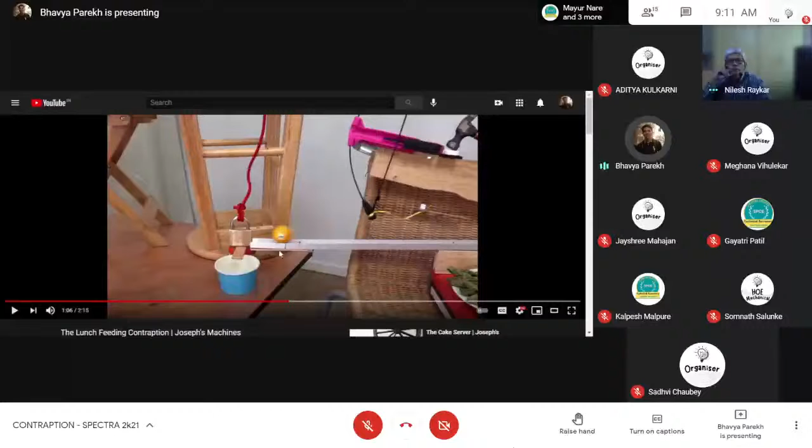Below was connected a ball. So just a very minute displacement of the string connected to the ball will allow the ball to roll. Part of the reason is that it is very important to keep such balls at their unstable equilibrium, so that even a small disturbance would allow them to roll and complete the mechanism.

Here the bowl filled with soup transfers some of its energy to the vertical section, and thus it falls down, and the bowl continues to travel further. And here are connected two cells. These cells are connected through wires to the terminals of a clock. So just when the bowl reaches the end, the clock receives power and starts to tick.

Here the bowl continues; it is hinged at the bottom. So as the ticking arrow pushes the other side of the bowl, it is raised more and more, and the soup is served.

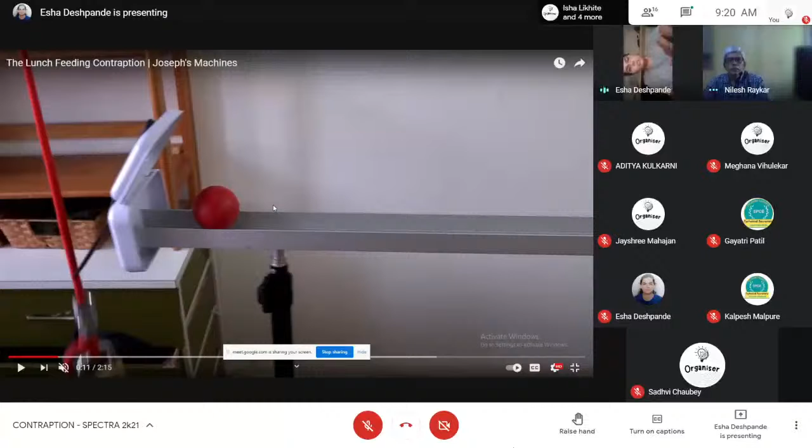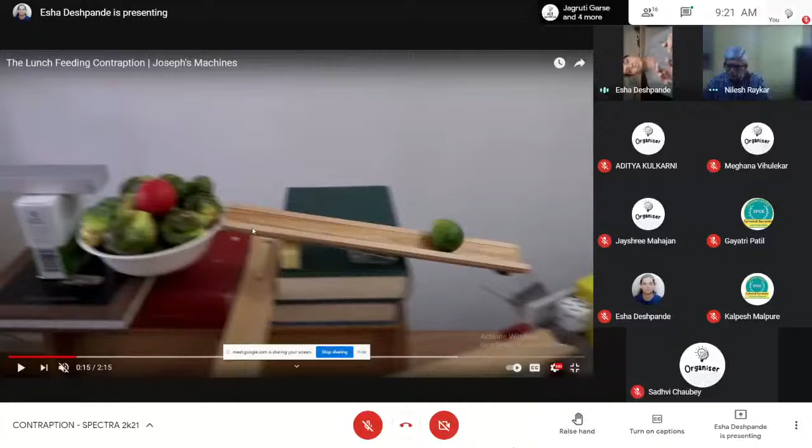As it rolls down, the ball falls in a Brussels sprouts bowl, pushes the Brussels sprouts, and the Brussels sprouts start rolling down. When the Brussels sprout is at the end of the ramp, more weight is acting at one end of the ramp and there is no weight on the other end. The wooden slide is fixed in the middle by a hinge, which is free to rotate. So the higher moment acts on one side of the ramp and there is no moment on the other side, so it moves upward.

When it moves upward, the slide is supporting the board, and the board is unevenly placed on the book. More weight of the bowl is suspended in the air, because of which it topples down. When the bowl is inclined, the ball again falls down and starts rolling on an inclined plate, and here the ball pushes the obstacle created to stop the rolling of the Brussels sprout. When the ball pushes the stopper, it falls down, and the bowl rolls down.

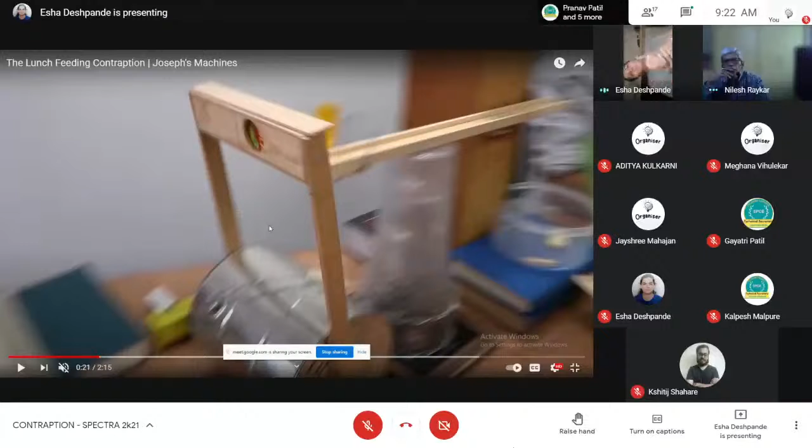While rolling down, the bottle is kept on the wooden structure to stop it from rolling. When the ball and the Brussels sprouts fall in that structure, they push back the bottle. Then the tin container is free to roll, and to acquire its equilibrium position, the tin container rolls until the wooden structure is horizontal. At that point, the Brussels sprouts fall in the container, and the ball again starts to roll.

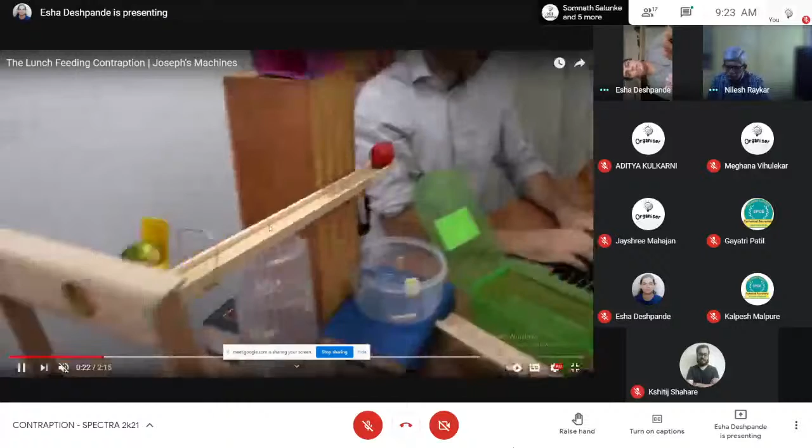When the ball starts to roll, it rolls through an inclined wooden surface at the end. Again, because of the higher weight of the ball acting on the other end of the rod, which is pivoted maybe a little lower than the center, the higher moment acts on the upper side, and the Brussels sprouts container moves horizontal and again rolls down to Joseph's mouth.

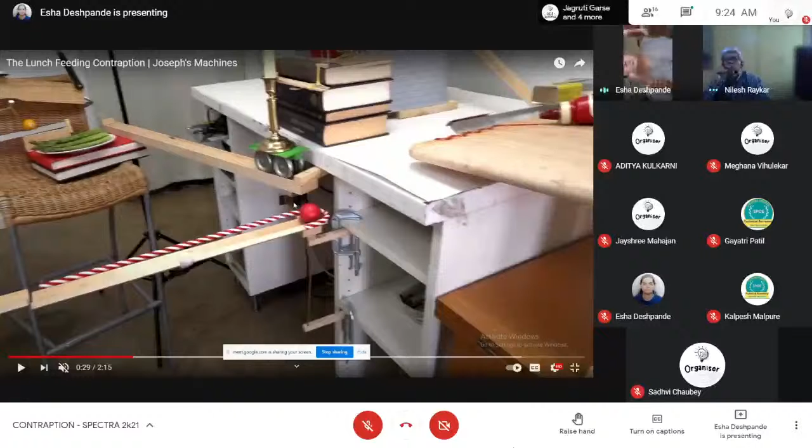After this, when the red ball rolls down, it falls in a container, and there is a hole in the container through which it rolls down further. While moving further, a Christmas red-white stick is attached, and when it collides with that stick, I guess because of a torsional spring, it tries to rotate as the weight is acting on it. After rotation, again because of the inclined plane, it starts moving.

Here it hits the weight, which is maybe lower than the weight of the ball, and the weight is attached by means of a rope to the clip. As the weight acts on it, the rope stretches the clip, and the orange placed on it is free to move.

And because again there is more weight at one side and no weight at the other side, because of that weight on the one side the moment acts, and that H type of wooden structure is open from the one end. Now because of again the inclined plane, the sausage rolls and is covered where the sauce is spilled; it's covered in sauce.

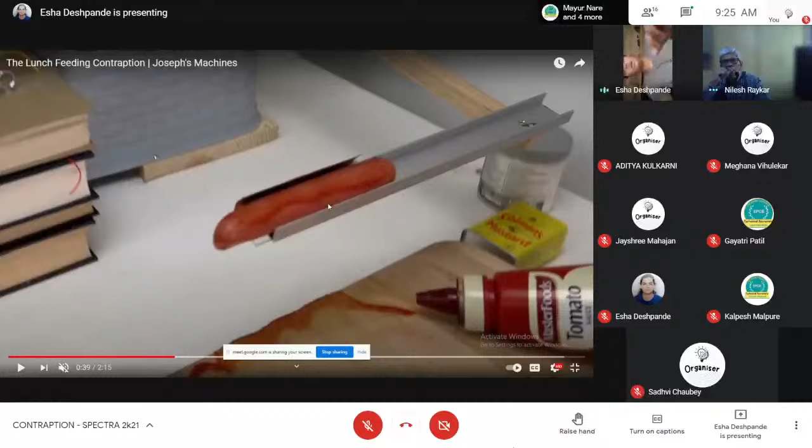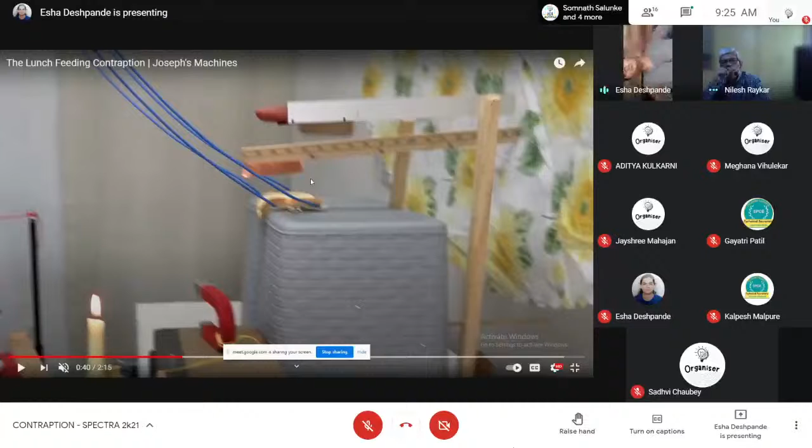And when the sausage enters that C type metal plate, when it's rolling down in the plate, because some weight is acting downwards and the obstacle given to it keeps the plate from moving, it falls down. And after that, while moving it, there is more weight attached on the other side of the board. And because of that more weight on the other side, it tries to rotate, and after rotating it falls

in a bread slice, where the bread slice is covered with a cotton or cloth which is attached with strings, and the magnets are attached to both ends of the sausages. When it falls in, it bends in the middle, and the ends of the bread and the cloth come closer, and because of magnetic pull it sticks. And after that it is just free to move.

Because of oscillations, two times it goes straight, but the third time when it's going in Joseph's mouth, Joseph moves his head a little bit, so that the path of motion of that string changes, and the bigger magnet which is kept there attracts the smaller magnet, and it gets stuck to it. And when the bigger magnet is attached to the small magnet, it falls down, and the rope tries to

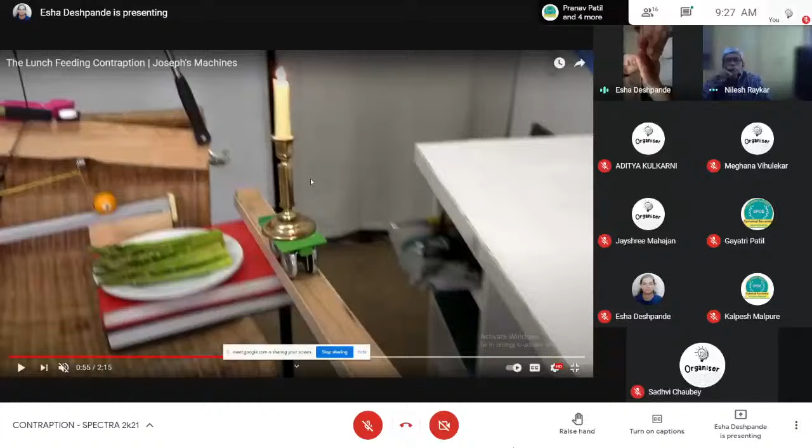pull the obstacle created for the candle; the obstacle rotates around the fixed support, and then the candle is placed on a rolling car-like toy, which is again on an inclined surface. So it again rolls down, and because of the flame of the candle, the hammer which is

attached with a plastic rope, the rope melts, and then the hammer, which is fixed at the lower end and free to rotate about that fixed point, falls down and triggers the bow, which throws the asparagus from the bow to his mouth. And in the last, there is a string attached to the rope of the bow, and

an obstacle created for the lower ball. As the rope of the bow is moved forward, the obstacle rope gets stretched, and the obstacle is rotated about its axis. The ball falls down, which then pushes the lock, and both fall down.

Sorry to interrupt you, but I guess your time is up now. Okay, sorry. Okay, yeah, that's right.

Okay, so Esha, now let's come to the very first thing, that ball, and that ball hits the fruit bowl in the beginning. Yes, sir. So, at what velocity should that ball hit the fruit bowl? Is there any calculation for that, so that the fruit is pushed out? Can you go to that part of the video? At the very beginning? Yeah, this one.

So how will you ensure that this ball pushes out that fruit and doesn't just drop there? Sir, actually, maybe the weight of the ball is comparable with the weight of that Brussels sprout. Okay. Maybe a little higher; if the weight of the ball is higher than the Brussels sprout, it can easily manage to push the Brussels sprout through the next ramp.

Yeah, but if it is too much, then it may push it out too much. Yes, sir. So not very much, but sometimes 2-3 grams more or 4-5 grams more. That is okay. That is by trial and error. But if you have to do a calculation, what calculation can be done?

So maybe the calculations of collision, the momentum. So the energy of that rolling ball and the Brussels sprout before and after collision must be the same. It is conserved, so after which we can get the mass and velocity of it. Okay. And if you have to replace this mechanism designed here by something of your own, what will you do here? You have to push one of the fruits out of this thing without using this ball.

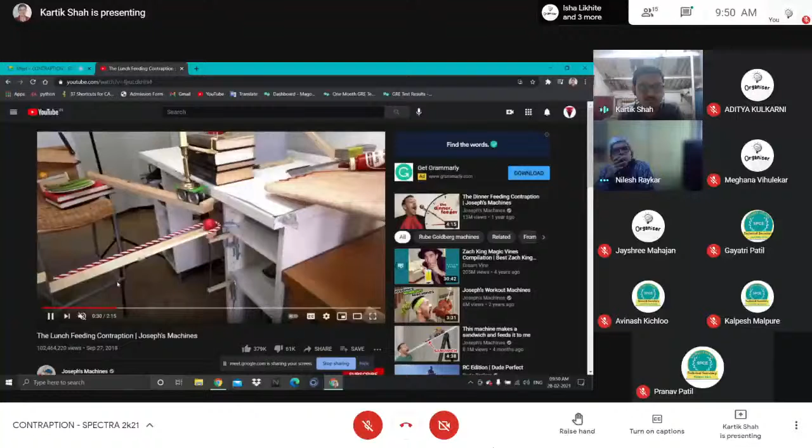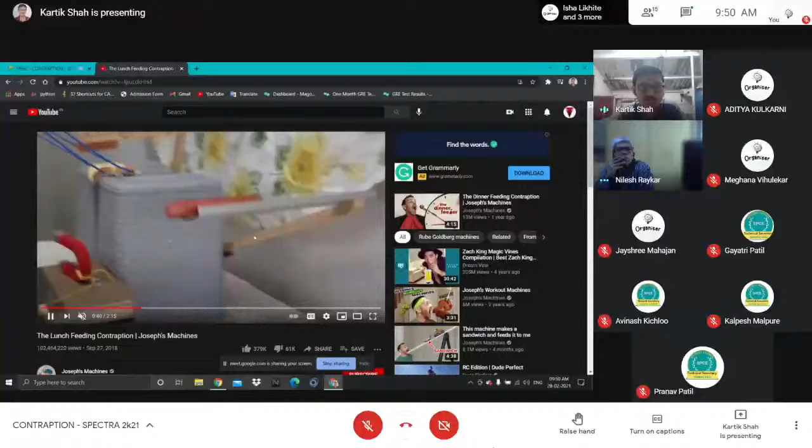So you can see that. See, it just moved back and then it started rotating. The torsion in this twisted cable was back to its original position, and now this will pull this, or the clip was stopping that orange ball. And basically all the rolling parts are due to the slope on which he has kept it.

So just skip this one now. He eats it, and then there is some metal part attached on the bun. You can see clearly this metal part, due to which it gets stuck to the magnet.

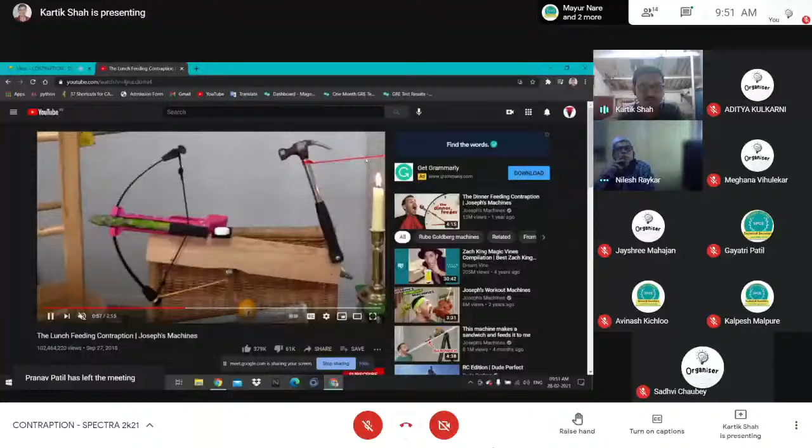Yeah, and then because this magnet was moved, it was released, and this will break due to the heat. And the lower end of the bow is attached to a string, this string, which will move this ball. So the bow will shoot this thing. Yeah, this is disturbed.

Yeah. And this cart has enough force to bring this down, and this battery gets connected to both the terminals, activating the clock. So it will just keep on pushing it up, and after a certain limit, when the edge of the clock loses contact with this thing, the bowl will automatically come down. So there's a limited time in which he has to drink all this, but he has timed everything.

Yeah. So basically, when the ball comes down, the upper system gets disturbed and it starts rotating, and this towel comes down. So this is the end. There is no more than this in this video, I guess. Yeah, this is the end of the video.

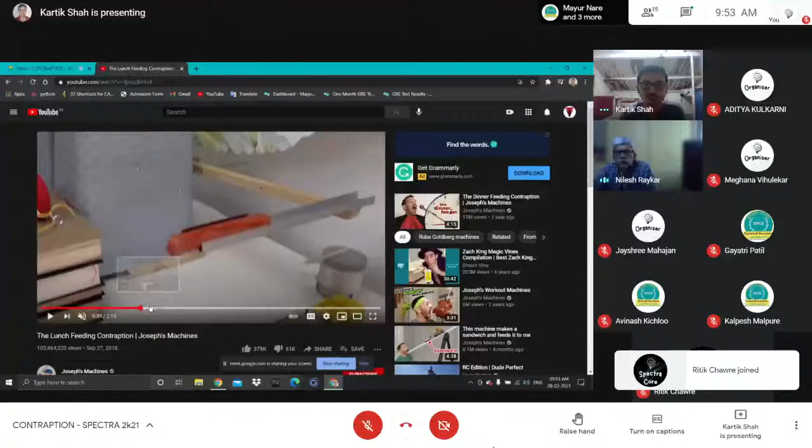Right. Yeah, that's good. Good timing. So you managed to cover everything. So one thing is that the sausage rolls over the ketchup and then it falls in that slot. I think it rolls because of the slope of the table, right? So how will you decide the slope? What will happen if you keep it too much, too less?

Sir, if I keep it too less, the sausage has a bit rough surface. We can't say it is perfectly round. There is a possibility that the sausage stops after some time. And if I keep it too steep, there's a possibility that the sausage takes the sauce and then rolls out of the steel part. It will just go off. So I have to keep a proper slope.

Okay. So one way of doing it is by trial and error. If you have to do calculations, what sort of calculations do you think of? What will be the final velocity of the sausage when it reaches the end? Sir, that I don't know. I can just do it by trialing. No, that is not something. It is just physics.

Yeah, it is just physics, but for these things we can just predict without calculations what the slope should be. But we are engineers, no? Now it is just a toy, but it may be a real defense machine you are working on, some weaponry, and this sausage may be a missile, and you can't make a mistake there. So you have to do precise calculations. So how will you do it?

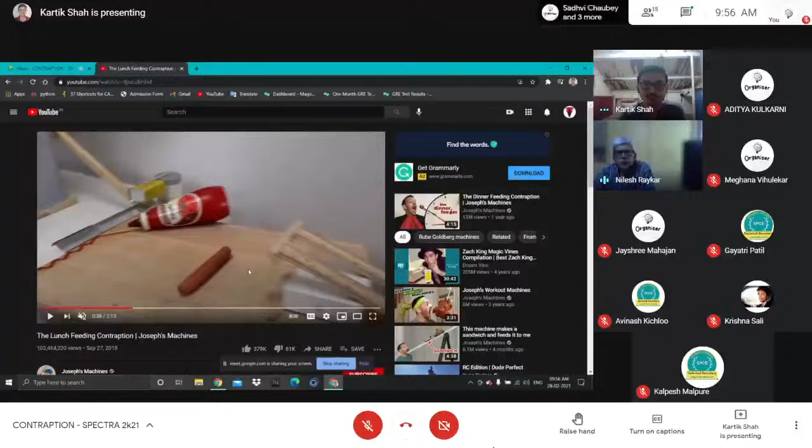Velocity is the distance covered per second, and omega is the rotation covered per second. Just one second, I need to solve it. I don't remember it, I have to derive it. Okay. Now you have to replace this particular transport of sausage from one end to the other end. What other ways are possible other than this rolling on the table?

Yeah, sir. So we can just do one thing. Like if this thing was down. See, when this thing is down, and if there is a spring in this box, so even on a flat surface, the sausage can go ahead. But then we have to consider the proper spring constant. No, that's good. Second idea.

Second idea. Spring is a good idea. So what is the second one you can think of? No, I'm not getting any more ideas. For rolling motion, we have to make it automatic. Either we can give a spring motion or a slope. Okay.

Okay, in this mechanism, which is the best part you liked, or what you thought is the smartest of all the different mechanisms? Which one you think is smartest? So the bowl one, actually. In this, the battery has to be in a proper position, which is very precise. I like this one very much.

There are six basic mechanisms. The first one is the pulley, with which our contraption video starts. It consists of the rope and wheel mechanism. In the video, the weight of the sellotape is less than the lock. So due to the weight of the lock and gravitational force, the lock comes down and triggers the next mechanism. Pulleys have been used in other mechanisms in the video.

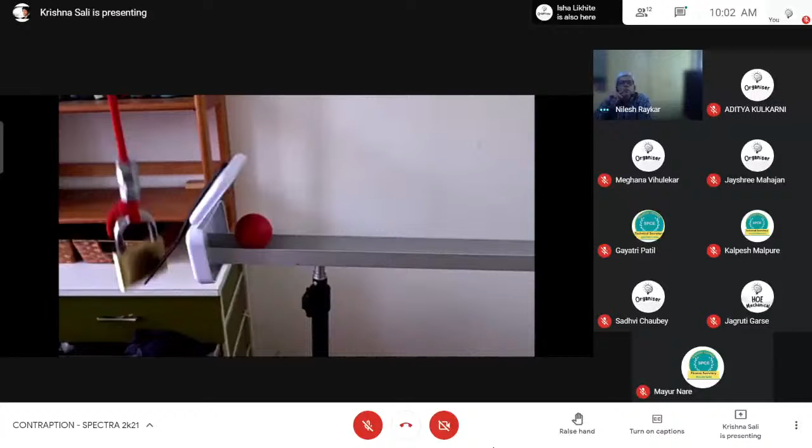The next mechanism is the inclined plane. On an inclined plane, we can easily move objects from a higher position to a lower position, but the object should be circular or round in shape. Due to its mass, it rolls on the inclined plane. Due to this mechanism, the video maker is able to eat that green fruit and roll the hot dog. The next one is the lever. It consists of the fulcrum and the plane on which the objects move.

In the video, a lever is a mechanism that is maximum used when force is applied at one side. Due to the forming of a couple, the other side rotates in the opposite direction. It is used to free the hot dog.

On the inclined plane, it is also used to free the ball at this position.

Then, at the end, for him to clean his face, there is a lever mechanism in which the distance of a rod at one cloth end is lengthier than the other end, so it comes down without applying much more force. So the next one is a wheel.

As we know, the wheel is one of the most important inventions in human history. It is used to shift objects from one place to another very easily. In the video, a wheel is used to shift the candle from one place to another, and also it is used to shift the soup bowl car.

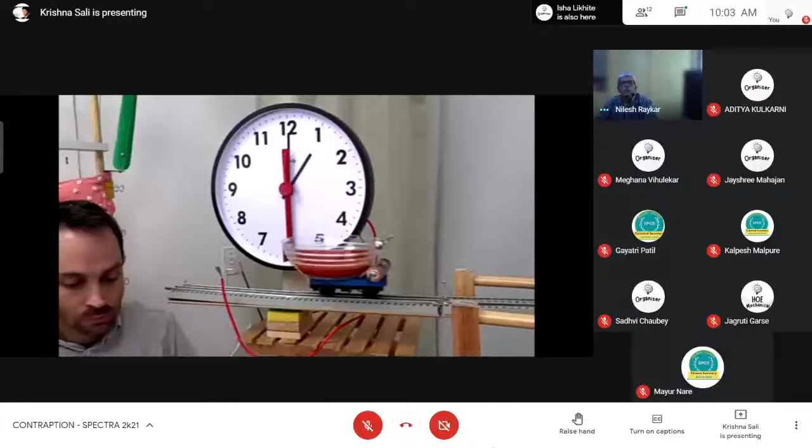The last two mechanisms are screw and wedge. The screw is not very much used in the video. A screw is used to mount two objects, and the wedge is used to cut objects. Examples of a wedge are a knife, axe, etc.

Along with these mechanisms, it is important to know some basic things like proper measurement, proper distance between the two ends to form the chain reaction, proper mass of a body, proper shape of a body, and center of gravity of that body, etc.

There are some mechanisms or effects which are not included in the above six mechanisms. These include the oscillation of a rope, because of which he is able to eat that hot dog.

Then the heating effect of a candle. Because of the heating effect on the string, the hammer strikes the iron bar.

Then the next one is the use of the hand of a clock to lift that soup bowl. Then the transfer of momentum from a ball to that fruit.

Then the magnetic effect on that bread - there is a magnet and there is another strong magnet. Then the next one is the potential energy of the iron bar, etc.

So, that is all about the mechanisms.

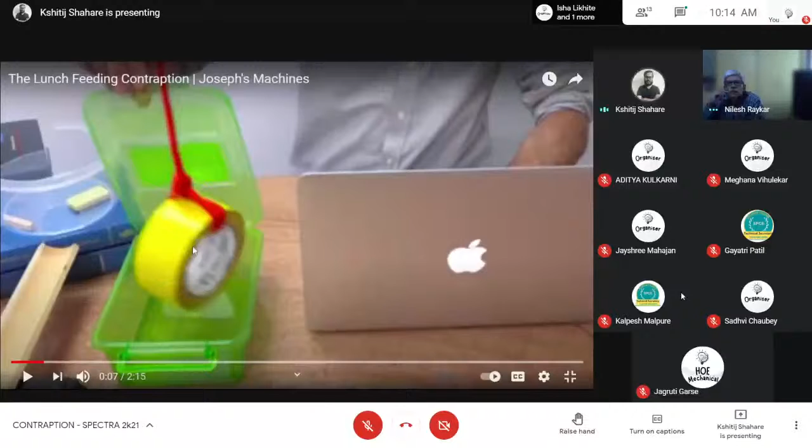The video starts with Joseph doing his work on a laptop, and at the same time he's hungry. So he opens his lunchbox, and here he sees a tape which is attached to a rope. The rope is attached to a pulley, and on the other side of the pulley there is a lock.

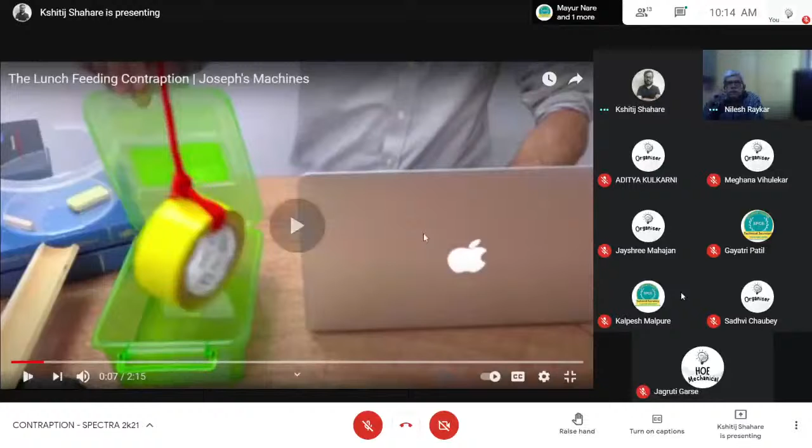So the lock, being heavier, goes down, and the tape goes up. The lock hits the spoon, and the spoon is connected to the lid of a bowl. As soon as the lock hits the spoon, the ball starts rolling in the rail.

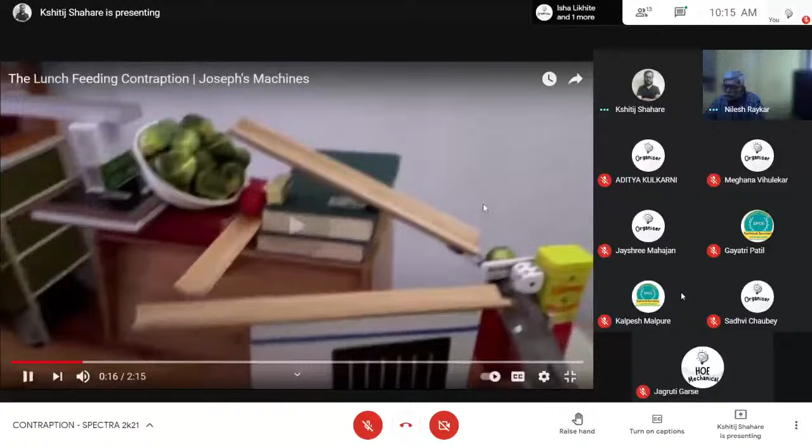Now, after the ball replaces those items, both items go into a shelf kind of thing. It was held steady by placing a bottle in the shelf, just so that the bottle can apply its weight.

But now the ball and the fruit have replaced the bottle, and now we can see the movement, the rolling tendency of the container, and thus there will be a roll. The shelf will also rotate about the center of the container.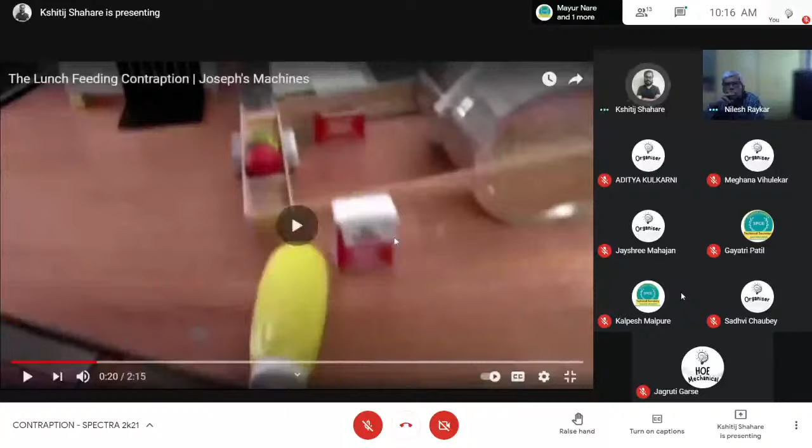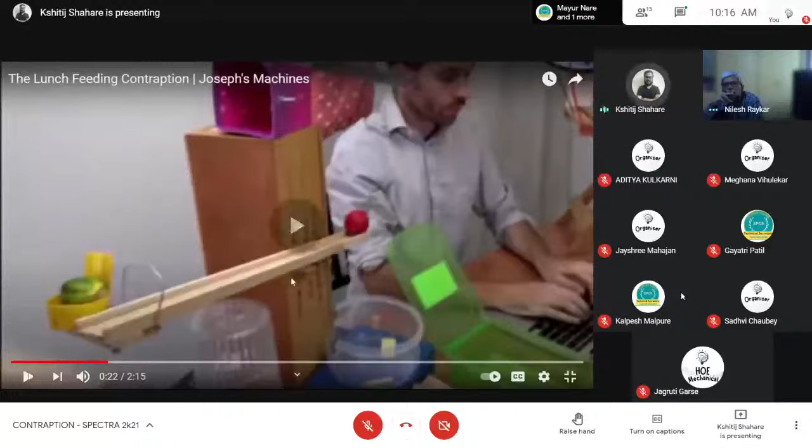There is a cup placed where the fruit goes, and the ball goes into the wooden rail. Again there is a seesaw mechanism. Due to the weight of the ball, the wooden rail tilts to one side, and we see the fruit rolling inside a rail and going into his mouth.

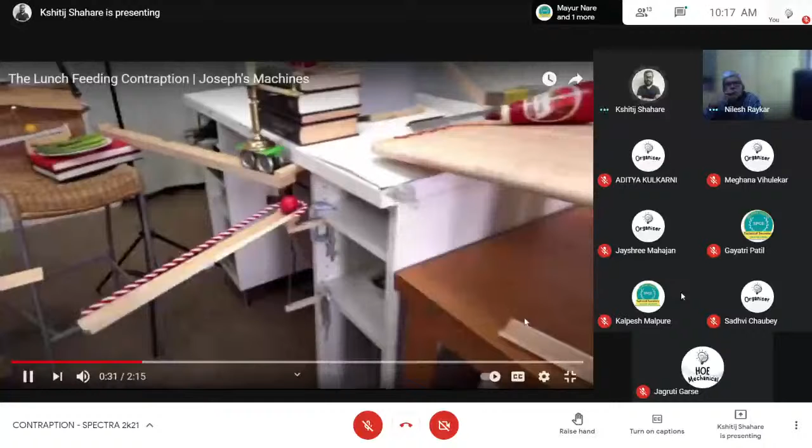The thing which was used to stop the orange was now apart, and we see orange rolling down, thus opening the way for the sausage.

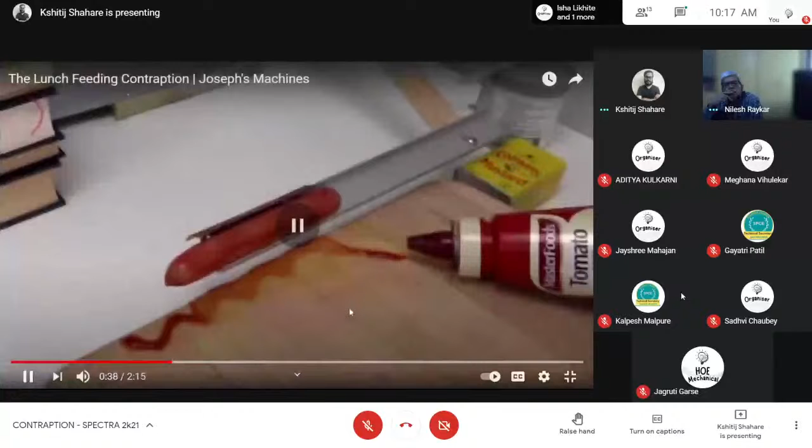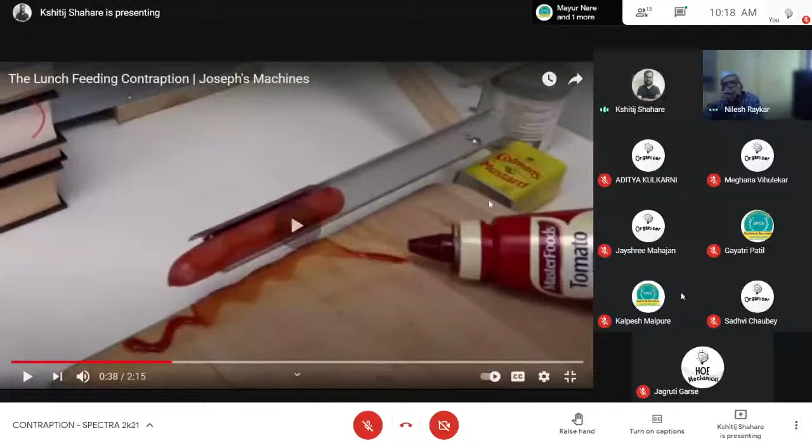Okay, so again, there is one pivot here. The sausage rolls, and the mechanism, the lever or the rail that held the weight of this yellow mustard box - as soon as the sausage enters the rail, the yellow mustard box displaces, and hence the mechanism is actuated. You can see here it is pivoted, and it goes to the bread.

And tied to it, an oscillatory motion of the rope happens toward the mouth. You can see here there is a magnet in the bread. This magnet gets connected to the candle, which is in a trolley - a small candle placed in a small trolley, held stationary by a wooden cuboid. As the magnet is connected to the bread's magnet, the wooden cuboid is displaced, hence creating a way for the trolley wheels to roll along the wooden rail.

The hammer hits the button kind of thing, and the bow - instead of an arrow there is a fruit - the fruit gets actuated and goes into the mouth of Joseph.

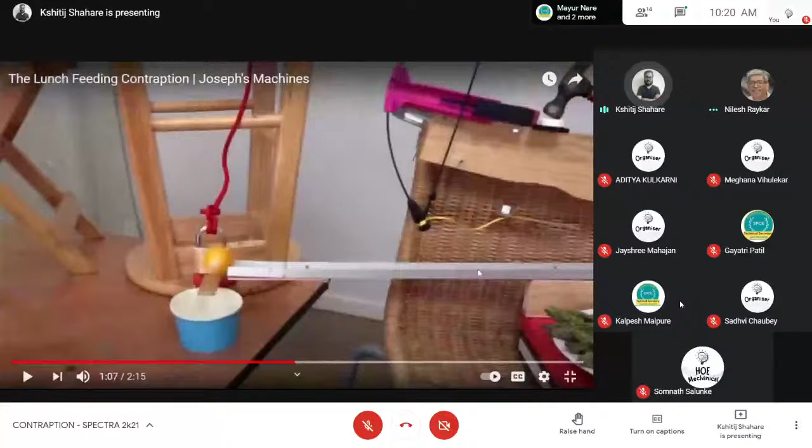Also, we see that there is a yellow cue ball placed here, and as the hammer hits, it also actuates this stopper, which is released, opening the way for this yellow cue ball.

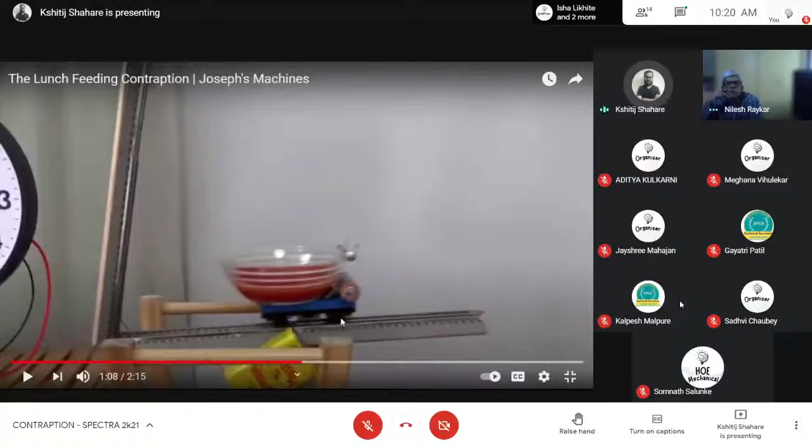So it goes down, and the lock we see was the one used earlier. There is a trolley in which a bowl is placed, held stationary by a yellow thing. As the lock and the cue ball go inside the cup, they pull the yellow thing which is connected to it by a rope, thus creating the way for the trolley and the bowl.

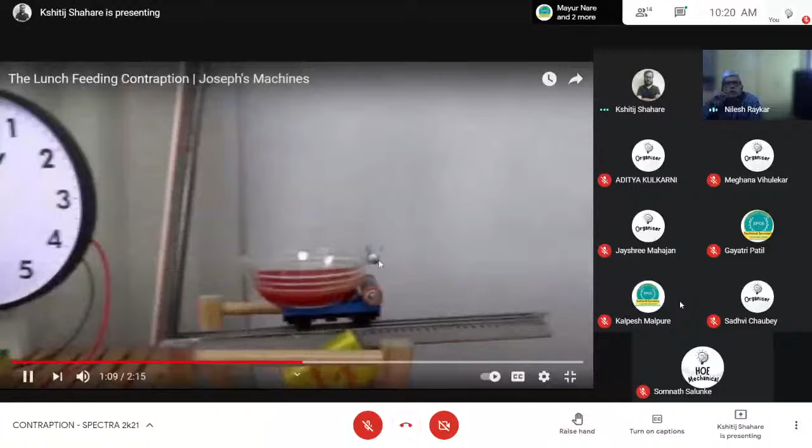Now here we see the trolley and the bowl - there is a battery, and here are the two terminals, positive and negative. We see those terminals get connected to each other, positive connected to positive wiring, and negative connected to negative wiring, and hence the circuit is completed.

Thus the clock starts working, and the needle of the clock then ticks, and it tilts the bowl.

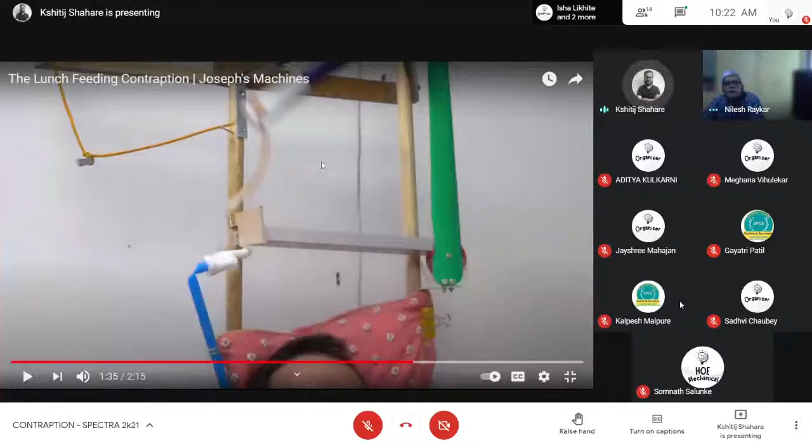The red ball is actuated, and it rolls along the rail, and is placed in this green thing, and it activates the blue mechanism. There is a pulley mechanism where this blue lever is actuated, and we see the other side as the cloth rotates - as the left to right side comes down, it wipes his face off.

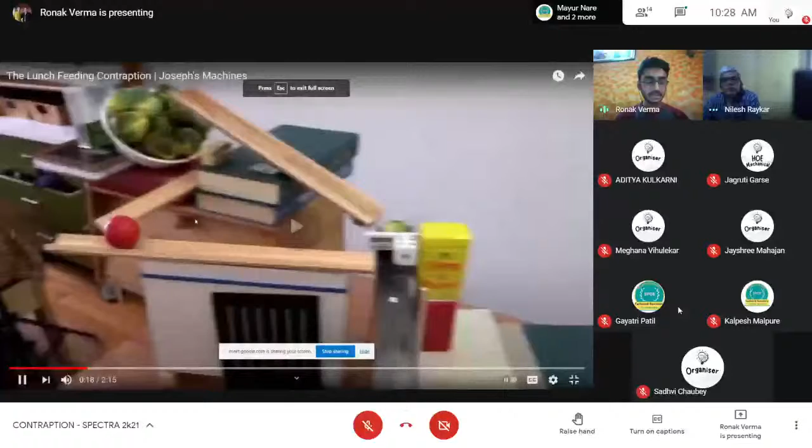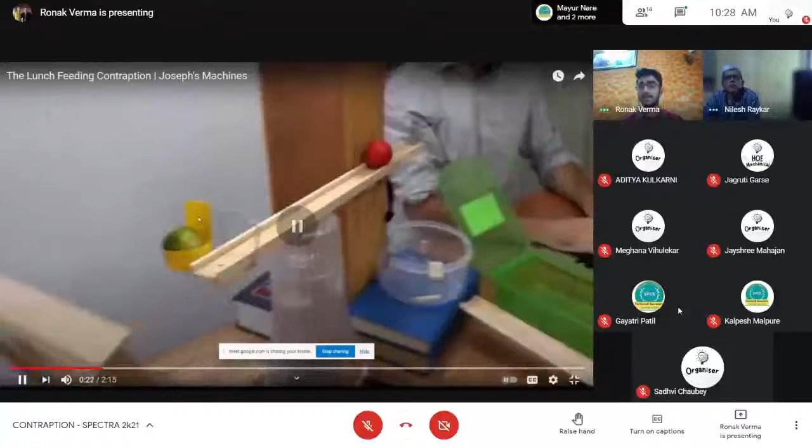So now, due to the potential energy of the red ball, it starts rolling downwards, and it hits the green fruit right there. This hitting of the red ball is called the domino effect, wherein the kinetic energy of the red ball is directly converted to the kinetic energy of the green fruit. Initially, the wooden rail was at rest, but as soon as the red ball reaches its right extreme end, the red ball acts as an effort to the load of the green fruit. Again, this is called the class 1 lever mechanism. When the load is sufficient, again the wooden rail starts to rotate.

Now, since this machine was carefully designed, even though one output of this lever, that is the green fruit, was consumed by another machine, a biological human, we still have one output remaining, that is the red ball down right here. Again, due to the potential energy, it starts rolling downwards. As we saw, the red ball knocks this pencil-like structure right here, and this triggers another movement, that is the movement of the orange downwards.

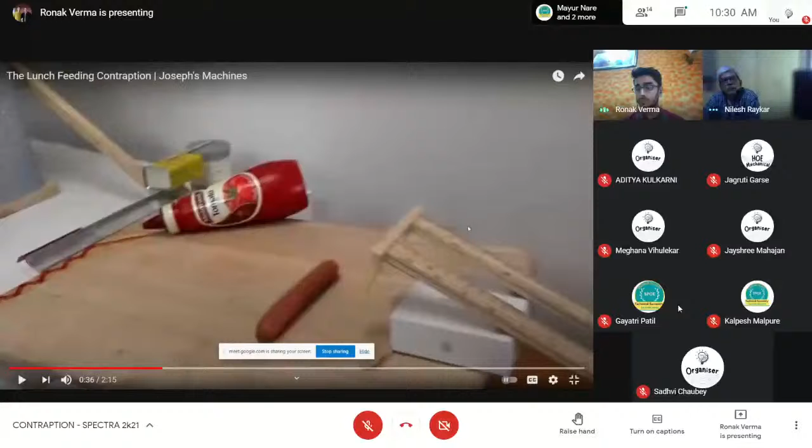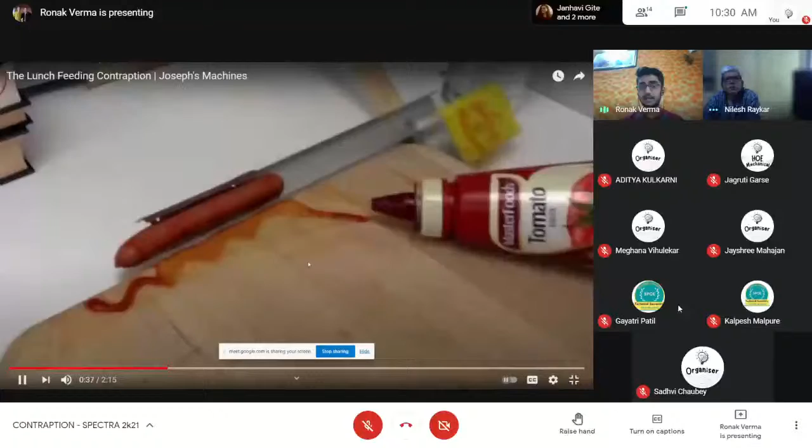Now again, this whole mechanism on the right hand side acts as a lever, wherein the orange's weight is the effort, and the weight of the sausage is the load. Now, as soon as the sausage is released, we see that the sausage gets attached to the mechanism. This mechanism is called a pendulum mechanism, wherein the load moves to and fro.

But now, since the human gives an angle to the pendulum, and the pendulum's load has a magnet, this magnet is attracted to another magnet, the horseshoe magnet, due to which the kinetic energy of the pendulum gets converted entirely into potential energy, magnetic potential energy.

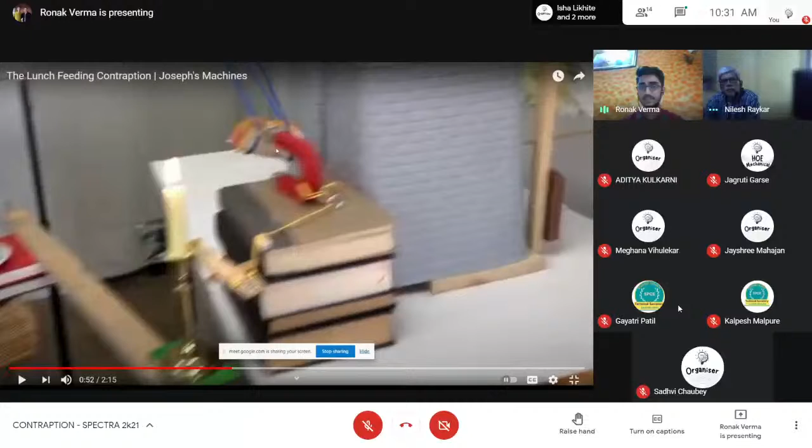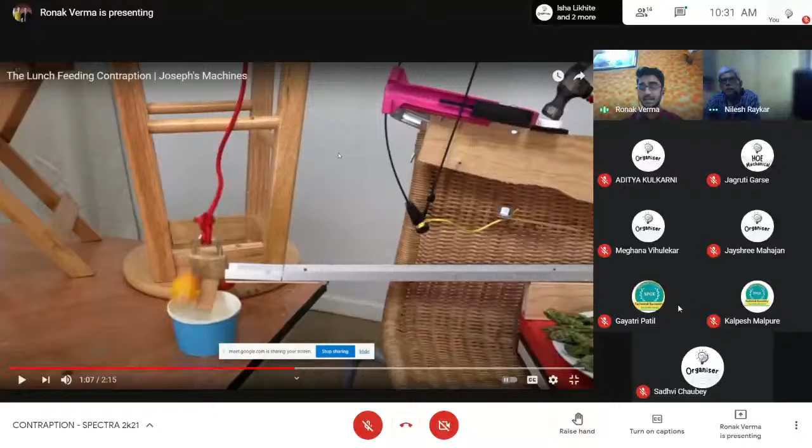That caused the movement of the candle downwards. And due to the heat the candle produced, the string expands, and after a certain length, it cannot expand anymore. So it breaks down, resulting in the formation of another trigger mechanism, similar to that of a gun, wherein the long green fruit acts as the bullet of the gun.

After having certain chain reactions, we reach this moment, wherein the second hand of the clock acts again as a lever, which causes the rotation of this soup right here, and the soup being spilled is consumed by the human.

Now, finally, once this load is released right here, this entire mechanism that is situated above the red cloth acts as a combination of small pulleys, releasing the red cloth finally. And I guess that's the end of this whole lunch feeding contraption mechanism.

Yeah, that's good, Ronak. Now, can you go to the tin container part where the red ball falls into and the container transports it? Yeah, so can you explain this particular part? So what triggers that rotation of a container? Yeah, so why does it turn up the arm?

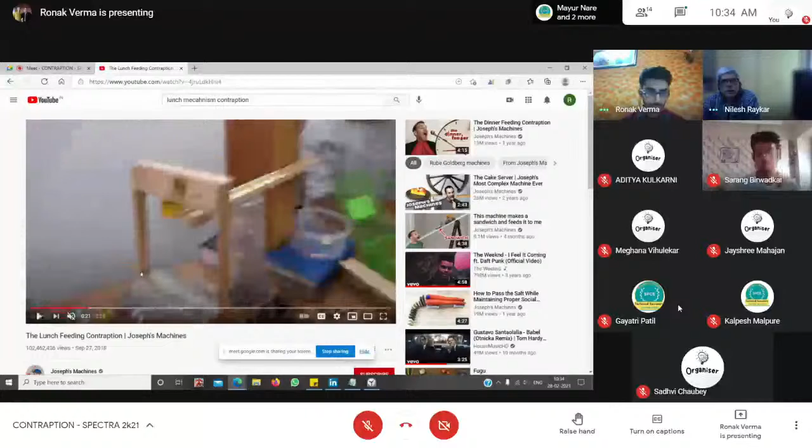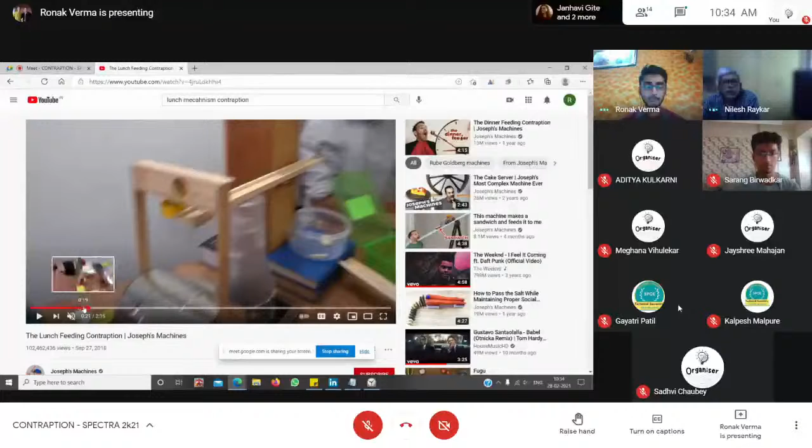So how do you have to design that container so that it behaves in this manner? If you keep it an empty container, will it happen, or do you have to do some adjustment? Yes, sir. We have to do some adjustments. Okay, so what is that adjustment? In the sense, why does that wooden bracket go from horizontal to vertical?

Sir, I guess we store potential energy in some or the other manner, so that once the wooden frame of this mechanism is free to move, it rotates in this direction. Exactly, I don't know, sir, but I guess there's some or the other way to lock and to store potential energy. No, it means how will a particular cylinder start rolling? Sir, when we give it a certain torque and a speed.

Okay, so can you think of anything? Can there be something inside that container which will make this happen? Yes, sir, once... No, sir, at the moment I'm unable to think. Okay, if you have to replace this mechanism by one of your own, what will you do? You have to elevate that ball to a higher elevation. That red ball falls down and the container lifts it up to a higher elevation.

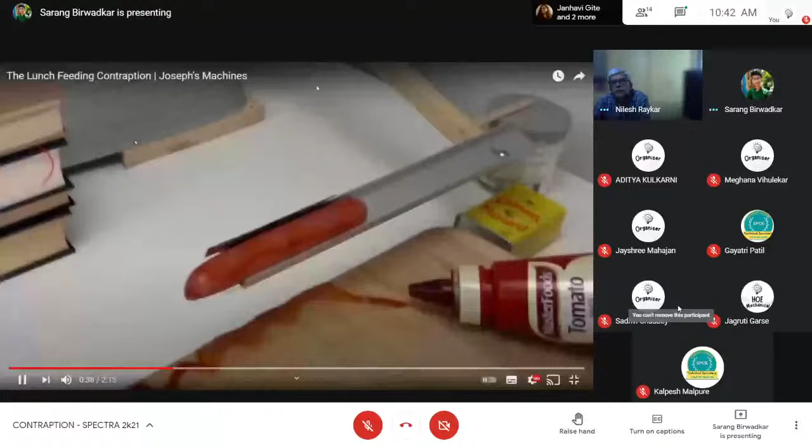And when this sausage falls on this, now since my video is off, there must be two kinds of supports holding this. I will switch it on during the Q&A, so that if you have any questions regarding this, I can show you.

So at this point, these breads are held by two supports on each side. So when the sausage falls on it, these two supports are loose enough to release this bread and set it into an oscillatory motion.

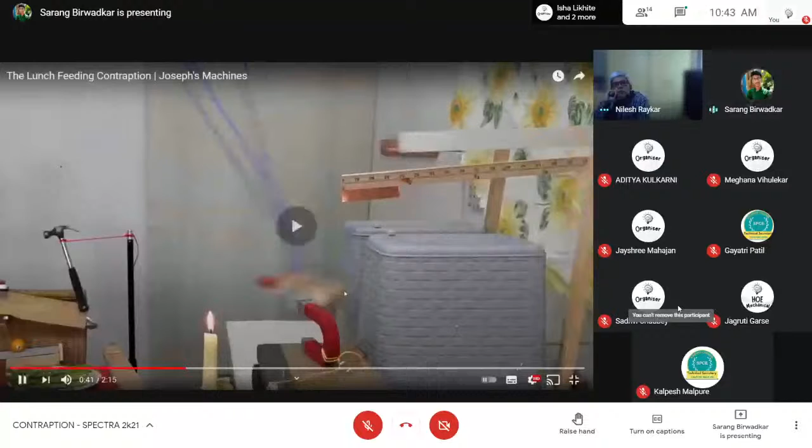So this guy catches the hot dog and then moves a little backwards so that when the sausage returns back, it will return to a position which is beyond this point so that he can catch it easily. Even though he did that, he needed to move a little forward to catch the sausage. Now he gives it an angle next time.

So he takes it and he gives it an angle to travel along a different path and then sets in motion some mechanisms to set this toy. Now this candle is mounted on a toy, which is a winding toy, which has already been wound and kept that way. So this toy contains a spring in it, whose potential energy is converted into kinetic energy,

and thus this kinetic energy makes this toy move forward with a certain velocity, and then the candle burns the string. As soon as the candle burns the string, this hits the cap here and just triggers the crossbow. Yeah.